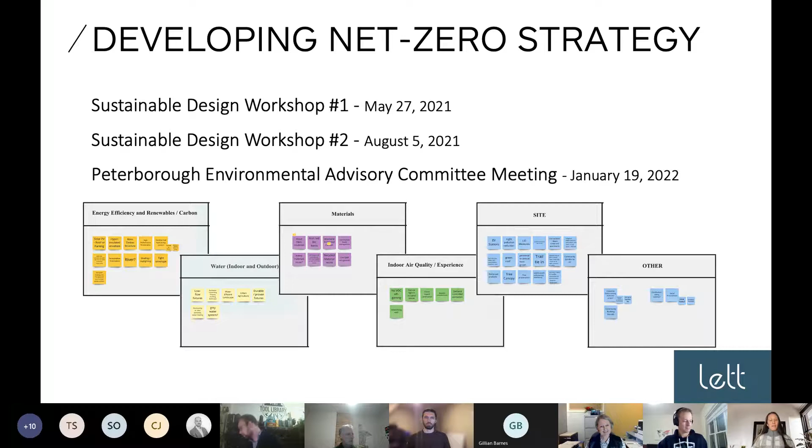The scope of this project is an 11,000 square foot single story post-disaster timber framed building with Glulam beams and cross-laminated timber for shear walls and the roof. We are building on a brownfield site, and this proposal impacts little or no existing trees and reuses much of the current grading from the existing building site.

We will have a full solar photovoltaic array on the roof. Geothermal heating and potential rainwater harvesting will provide for the net zero energy certification to be achieved through this project, while material choice and carbon accounting will assist us in bringing the building in line with net zero carbon certification.

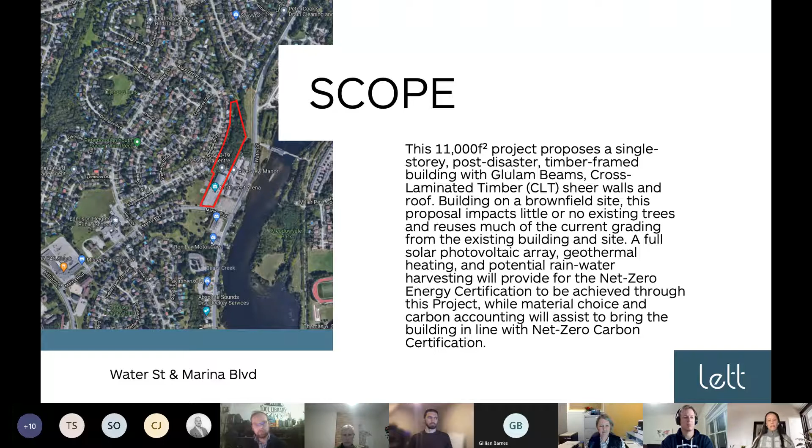This is sited at 100 Marina Boulevard, where the current Northcrest Arena exists and is currently under demolition. We wanted to illustrate here that the existing entry is being maintained in this location, but upgraded for the purposes of fire services. So the location is really prominent and important there.

The grading is largely being reused and just adjusted for the purposes of the fire department. The footprint of the project doesn't extend quite as far as the existing Northcrest Arena, and we can go into that in a little more detail later, and we are looking at preserving the tree line at the north of the property.

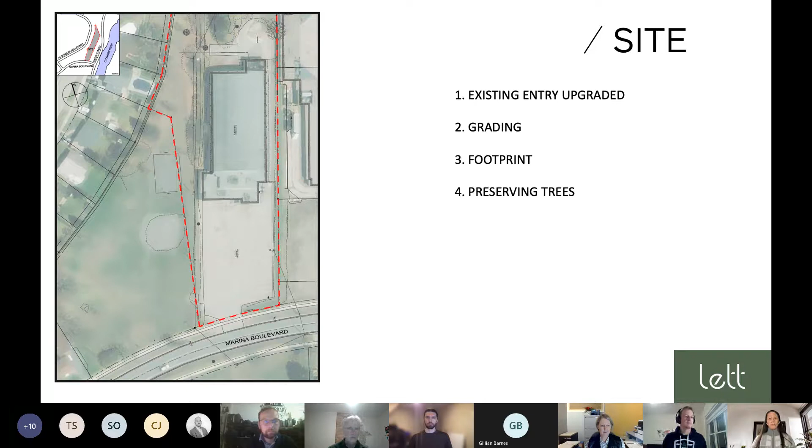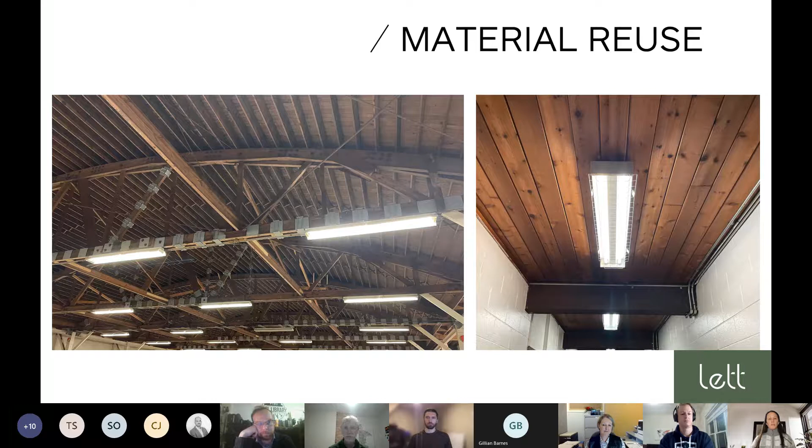We have the great fortune to salvage material from Northcrest Arena in the process of demolition, and so there are some timber joists that are being salvaged from the roof and some of the ceiling material that will be reused in the fire station proposal.

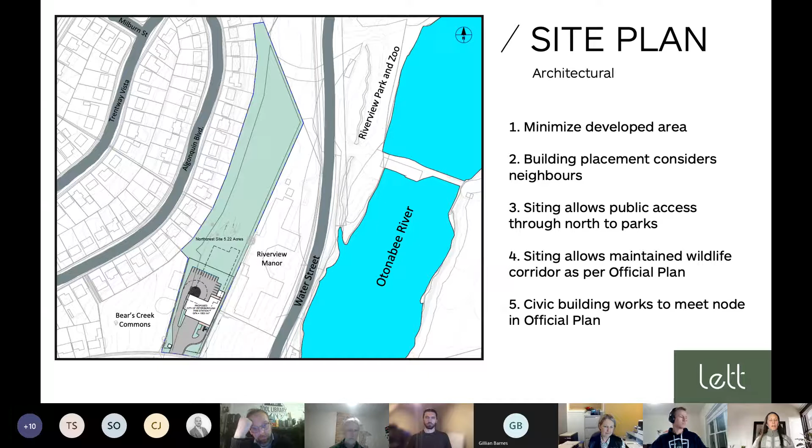So our site in closer detail, we have a number of features on the site we wanted to draw attention to. First is the visitor parking location at the southeast corner of the building. We have the truck bays off to the west side of the building. Staff parking sits at the rear of the building, and we're planning future EV charging stations.

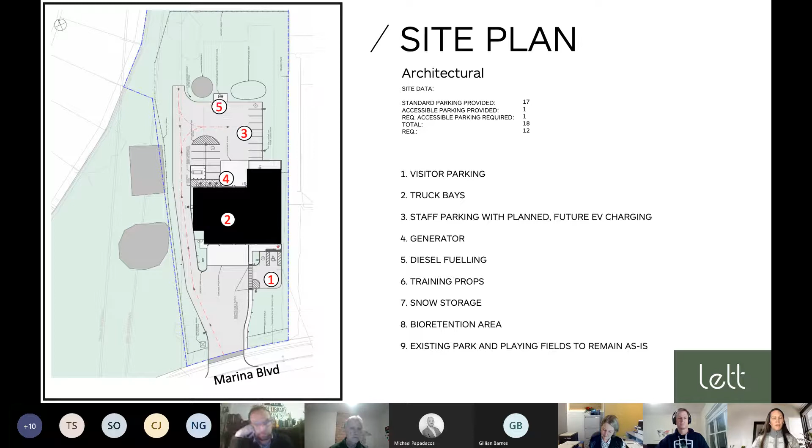There is a generator on site located at the rear of the building. The diesel fueling station is for the refueling of trucks.

The fire department has developed a training prop area that will allow them to continue training on the site. And we have snow storage areas held off the parking area. The bioretention area facilitates stormwater management on the site and ensures low impact development is a critical part of this design. And finally, we're maintaining the existing park as is, adjacent to the property.

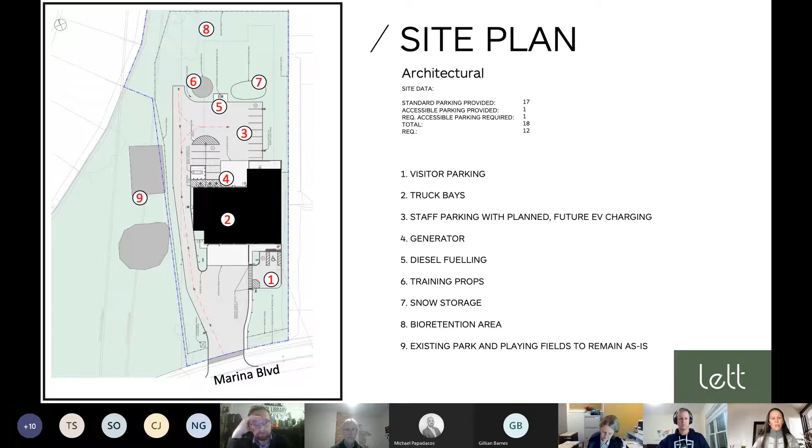Again, featuring the bioretention area for on-site stormwater management. And on the roof, we will have a full photovoltaic array.

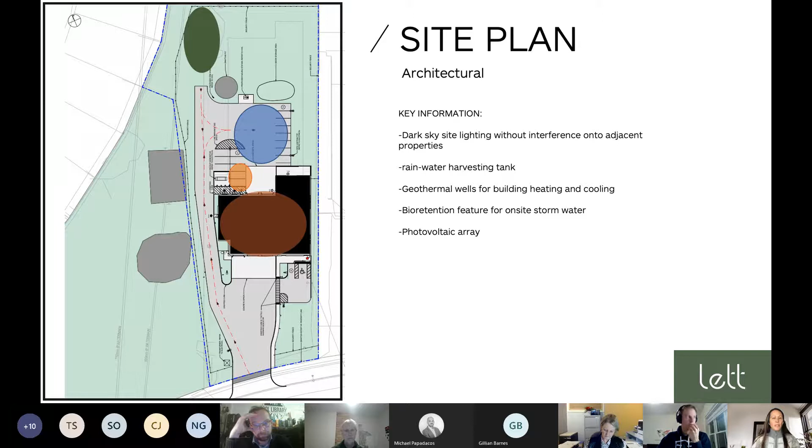With regard to landscape information, we are including 2 street trees to maintain the existing boulevard along Marina Boulevard. We'll have a garden area with signage at the front of the building to draw interest and create additional habitat.

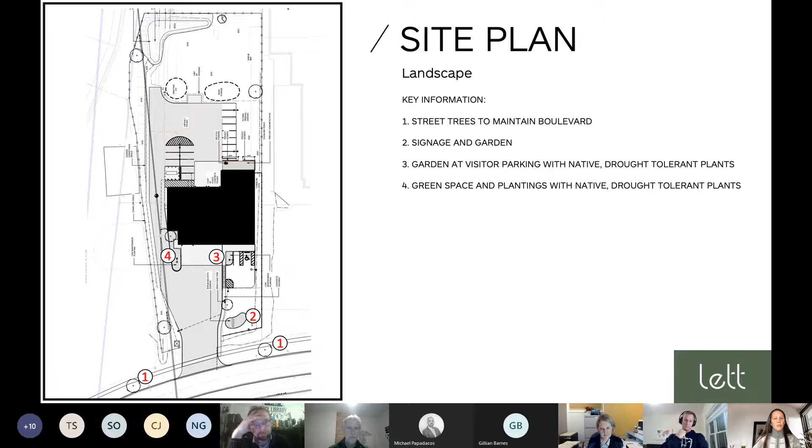There are 2 garden areas. Number 3 is at the visitor parking, and number 4 to the west of the apparatus bay apron, both planted with native and drought tolerant plants.

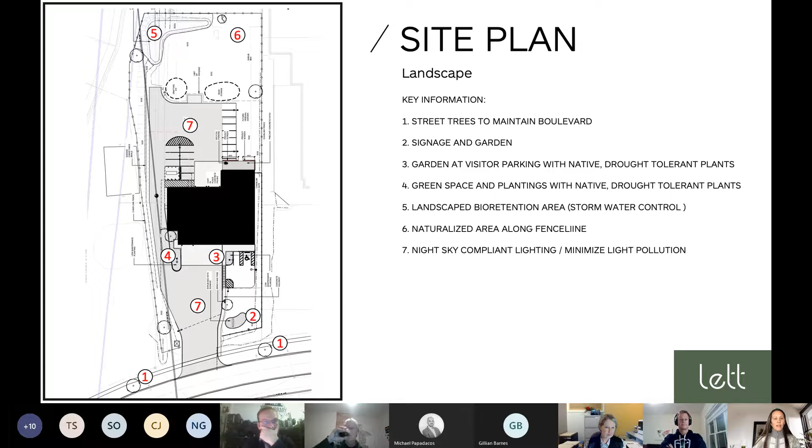Again, highlighting the landscaped bioretention area and stormwater control at the northwest corner. There's a naturalized planting area along the fence line at the back. Again, night sky compliant light fixtures minimizing light pollution will be used on the site.

For the exterior of the building, we want to ensure the landscape works with the building. So the landscaped areas really provide an opportunity for ensuring green space and lessening the heat island impact within the parking areas. We have, as noted before, pulled the building back and the site development back from

the current Northcrest Arena setting, which allows us regreening of the property and emphasizes the importance of minimizing the asphalt and hardscape spaces on the site.

The canopies provide coverage at the extensive glazing areas, ensuring we're not overheating the building. The glazing does, however, provide a lot of substantial natural lighting within the building and offsets the electrical lighting load required for daytime operation.

There's a number of features in regard to material applications as well. We are considering the use of wood cladding at certain key elements of the building, and wood being a carbon sequestering material helps with the carbon accounting side of the net zero carbon application. The structure itself is a timber framed structure, and so that also, as a wood element, is carbon sequestering.

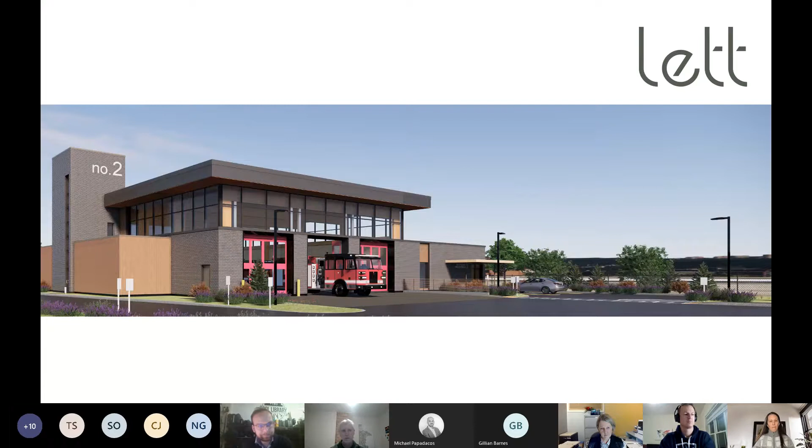And then looking at locally or regionally sourced materials for the rest of the materials. And I will turn over to Grant Peters to look at the rest of the information in the proposal.

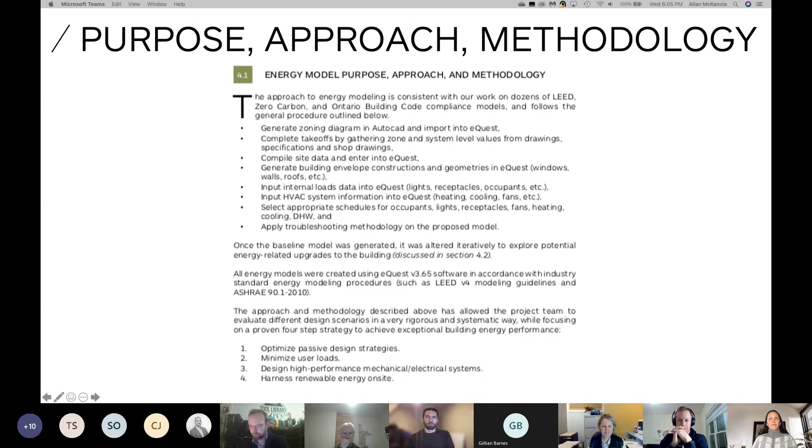Sorry, Allan, do you mind? Next slide. Sorry, you don't want the scenarios? Oh yeah, sorry, that hadn't popped up for me yet. So yeah, sorry, thank you.

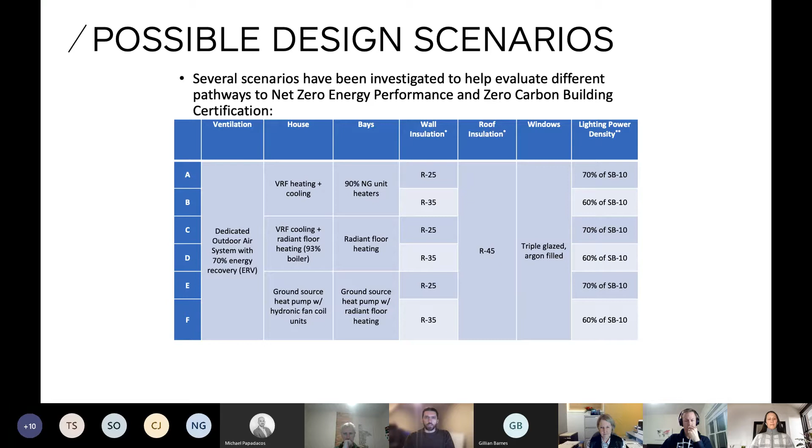As part of the feasibility study, we looked at a number of different design scenarios related to energy performance. They go A through F, and these are all improvements upon the building code requirements. There are a number of parameters, but basically looking at different mechanical systems, different insulation values for the walls, roof, and windows, and different lighting power density targets for the electrical design. Each of those builds upon each other so that F is the highest performing of the group, and that's in fact where we settled as a design team. That includes ground source heat pump for heating and cooling energy, very high performance walls, roof and windows, and very low lighting power densities. That combination of factors is the baseline and where we stand at the moment.

There's a couple graphs here. You don't have to worry about the metrics per se, but this is called energy use intensity, or EUI. The baseline on the far left is code, and you can see a number of these scenarios drive down to where we ended up. Blue is electricity and orange is natural gas. You can see we ended up on an all-electric solution, which is helpful for the zero carbon performance the building is pursuing.

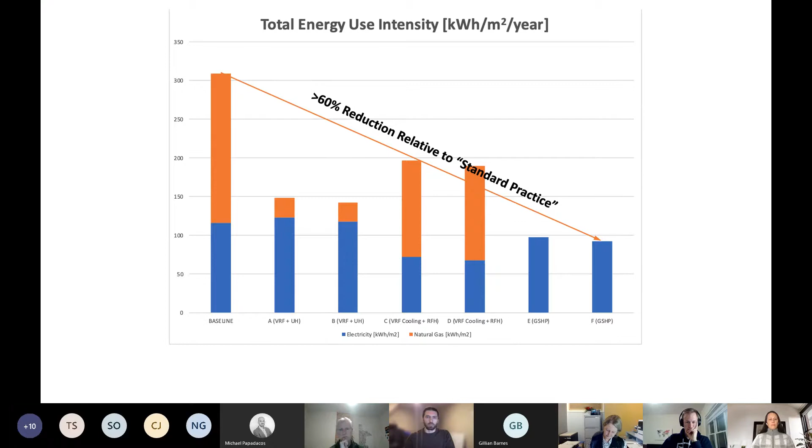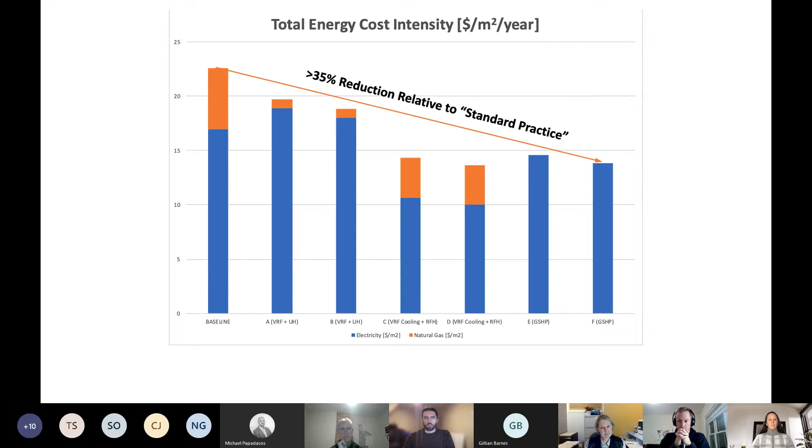Cost intensity isn't always reviewed in as much detail as energy intensity, but because different utilities have different costs associated with their energy content, you can see on a per square meter basis we're still ending up with the least expensive option operationally, but it's not nearly the same reduction as when looking at the energy consumption metrics. That's because the cost of electricity for the same unit of energy is much more expensive. So the electrification piece, while a big benefit for the emissions calculations, is not as beneficial when it comes to the cost calculations.

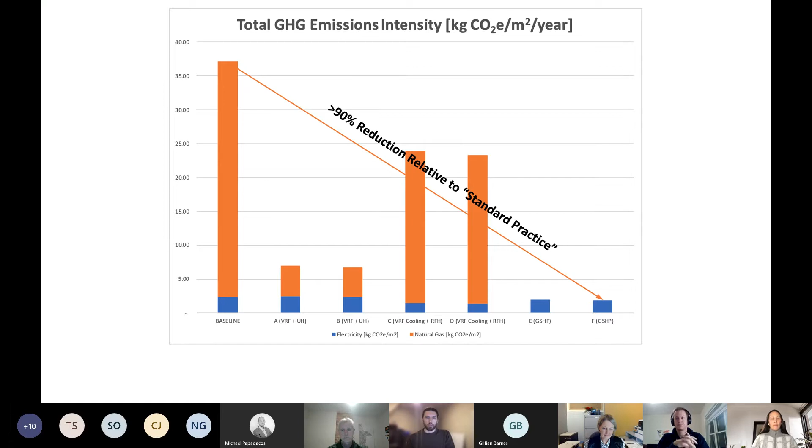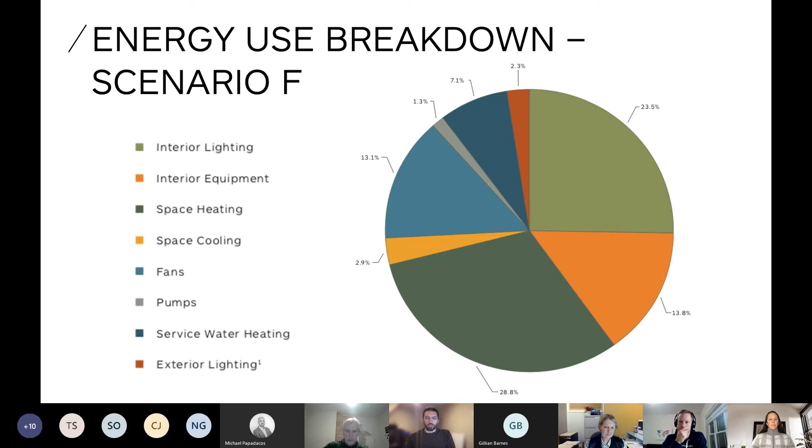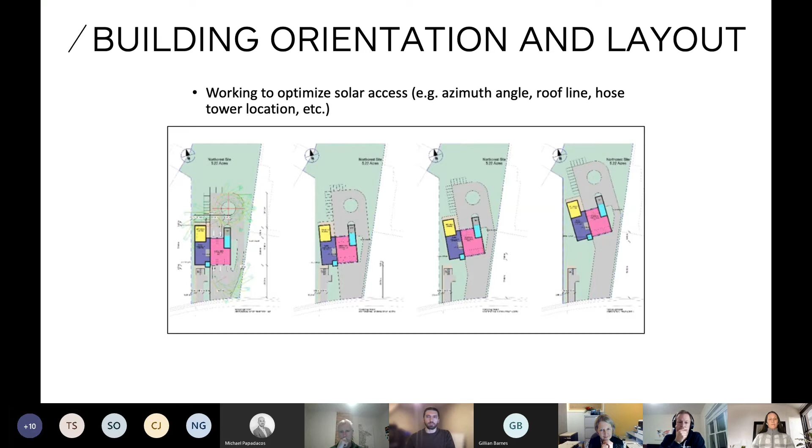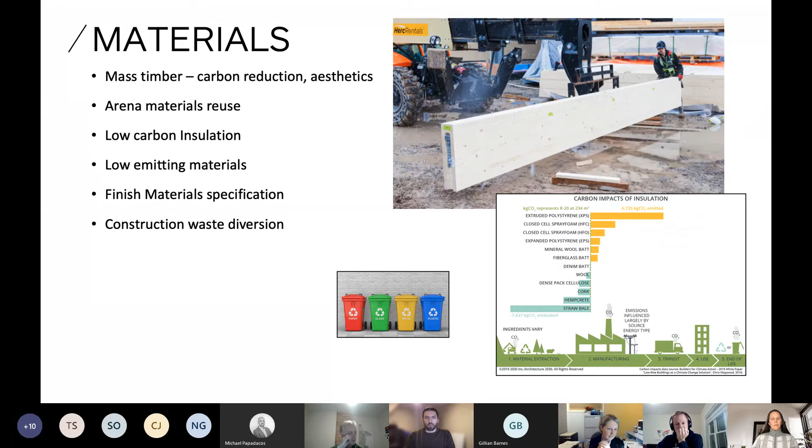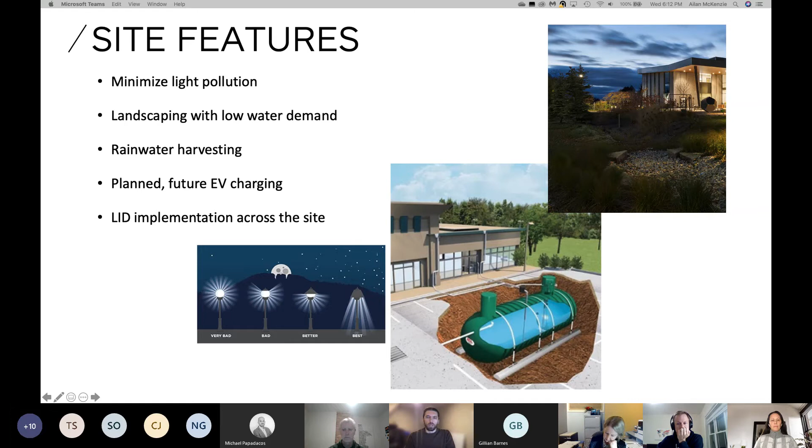I can provide more detail if there are questions, but right now there's a 7,500 liter cistern proposed. It would collect water from the rooftop and be plumbed back to indoor plumbing fixtures, as well as potentially the truck wash stations within the apparatus bay, and also potentially the landscape hose bibs on the exterior of the building. So quite a few different water uses it could serve, obviously offsetting the potable water the building requires.

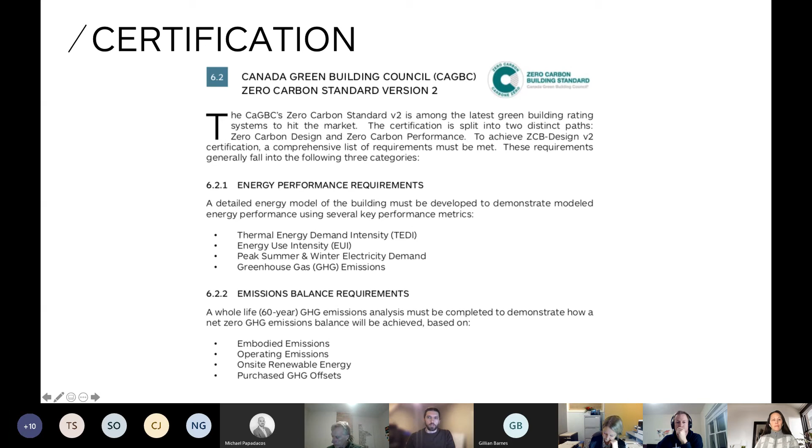These are the things I just discussed about that standard, and I'm happy to go into more detail if there are questions.

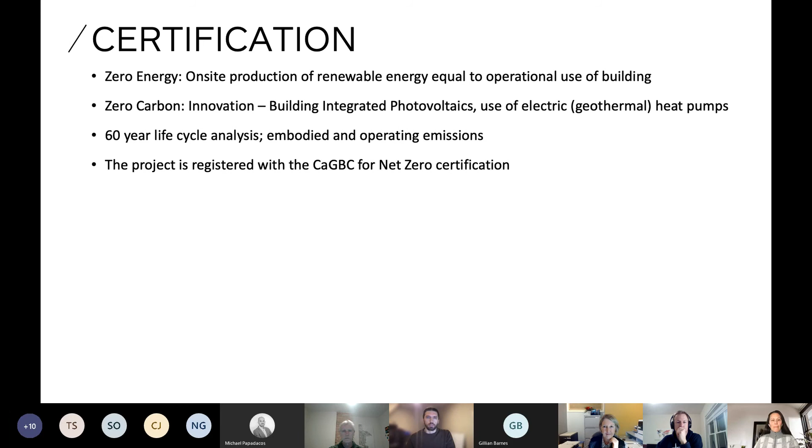That wraps it up. So that was fairly quick, but in conclusion, the feasibility study landed on scenario F, with solar on the rooftop aiming for net zero energy as well as net zero carbon, but also auxiliary environmental impacts on water consumption, indoor air quality, materials reuse, and construction waste management. A lot of people focus on energy and water, but as a team we're trying to incorporate some of these smaller aspects too into the design and construction, which will translate to a healthier indoor environment for the firefighters and a more durable, higher environmentally performing building in the long run.